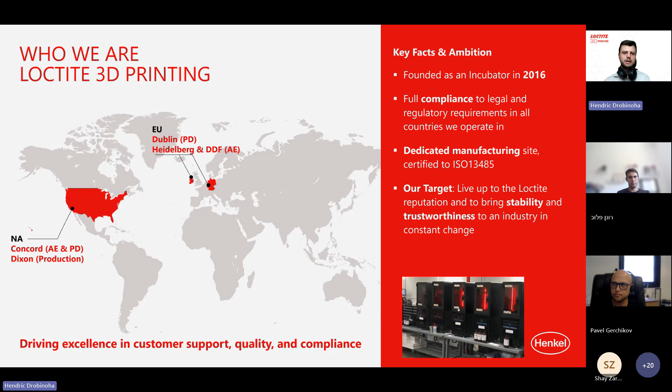We have in total 3 different sites: Heidelberg, where I'm located, then we got Dublin, and we got Concord in California.

What are we offering? As said, we are materials only, and we cluster our materials into 3 different sections. We have the photoplastics, where we have the tough materials, like ABS-like materials or PP-like materials. I don't really like those namings, but you get it. And the high temperature resistant materials, as well as chemical resistant materials.

Then we have in the middle the photoelastic. So photoelastic is the elastomeric resins, because our resins are not elastomers, they're elastomeric-like, because the complete base of our materials is still acrylate, the polymer acrylate, and just the additives and different ingredients make the materials tend to one specialty or another. But we don't have a real elastomeric, even though people say about their materials that they're elastomerics.

And then we have the last sector, which are the resins for healthcare. I will speak a little bit more about that later on, because healthcare can be very complex, and the approach in the market is very confusing, to be honest, because everyone is talking about biocompatibility, and by the end of the day, it's not working out and no one knows why. So I will talk about that more later on, but we do have materials for the healthcare sector for medical devices.

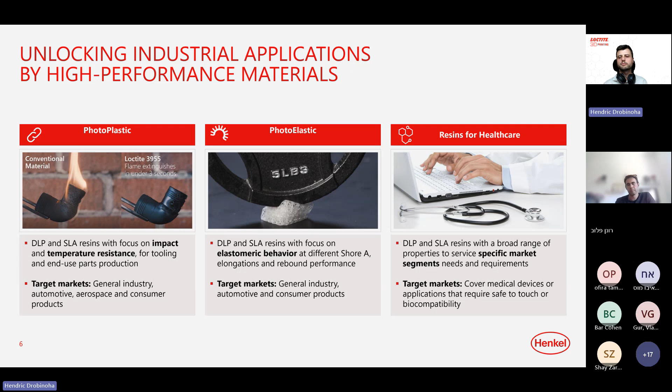That being said, I don't want to lose any time, so let's jump into our materials. We say that data is our currency, so our whole organization is built up in a way that we're fully focused on our materials and creating data.

Sustainable and real data. On the website, we'll make an excursus later on so I can show you some tips and tricks where you can find some stuff on the website. But it's really all about our technical data sheets. That's our most valued document, and we try to have an approach where we give the customer as much data as possible.

Compared to other conservative materials where you maybe have like 2 or 3 pages just with absolute data on mechanical and thermal properties, we really extended that to having more aging data, resistance data, and so on and so forth. So our technical data sheets are really our bread and butter.

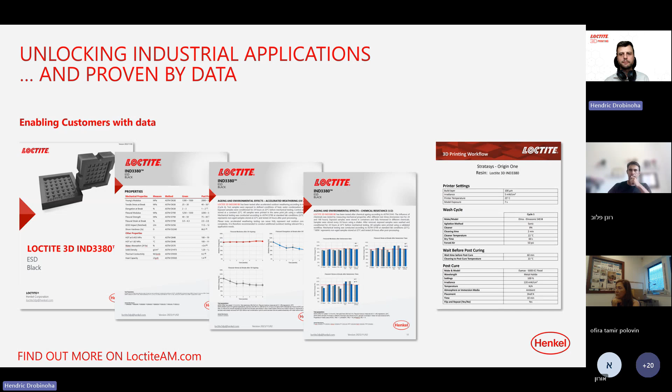So the first one is the ESD material. ESD in 3D printing is not new, but what's new is the very high temperature resistance of this material. It can easily withstand 200°C, and has an HDT of 190, meaning at 190°C it starts to deflect under a certain load. It's a very stiff material, but also has very low elongation at break, so it's not a tough material. It's very rigid, very stiff, but high temperature resistant.

In terms of ESD properties, it's in the middle. If you have customers in the electronic space asking for an ESD-safe material, that can mean everything within the range of the standard, which is 10^4 to 10^11 ohm surface resistivity. That's quite a big gap, and that's something we discovered while developing this material. We could go more to the low, dissipative side, or more to the isolator side. So we asked a lot of customers what their preferred range was, and it turned out everyone had specific desires. We ended up in the middle. Even though we display 10^4 to 10^11, this material is more in the middle when it comes to ESD properties. We try to cover the broad spectrum.

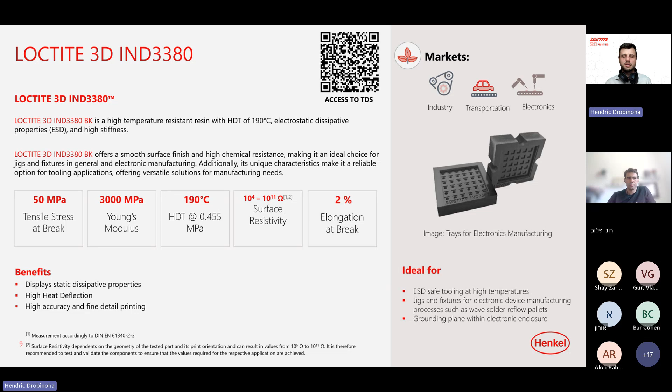People ask us, what can I do with this material? For sure, there's jigs and fixtures, tooling, soldering. But I picked out a case study from Nokia, because I think it's always best to have something tangible to show what the material is capable of.

So Nokia had an issue. They have very expensive PCB boards, and you don't want to waste them, not just for sustainability but also cost. So they want to repair their boards. If they want to desolder a part, they need heat, but it's very hard to concentrate a heat beam on a specific area of a PCB board - you always heat up the area around it. That's what's happening here: they're using an infrared spectrum heat lamp, but they're also heating up everything around it.

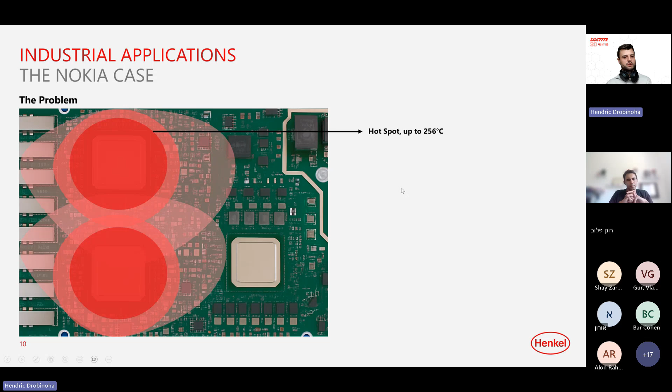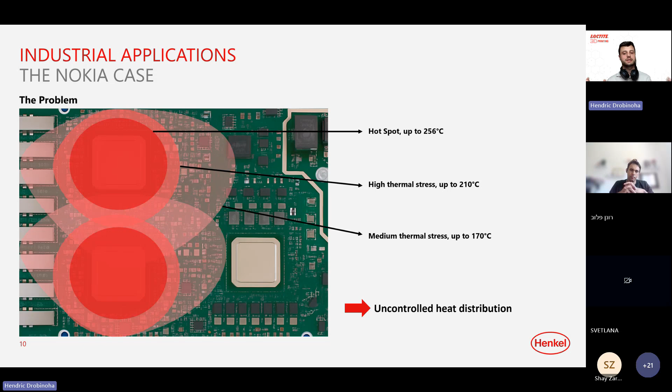This is an issue because you want the hot spot in the middle at 250°C, but you also get high thermal stresses around it. So you have uncontrolled heat distribution, potentially damaging parts on the board around it. So they thought, okay, we need a shielding solution.

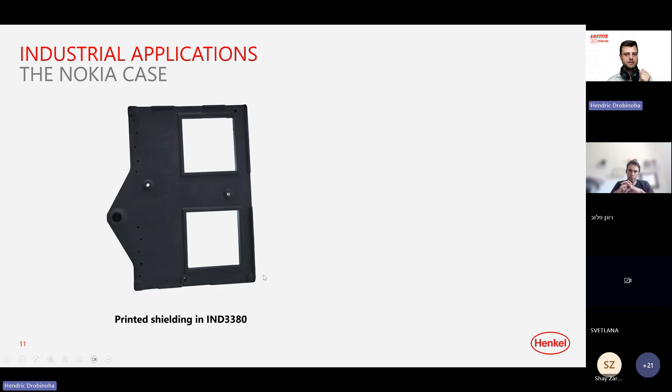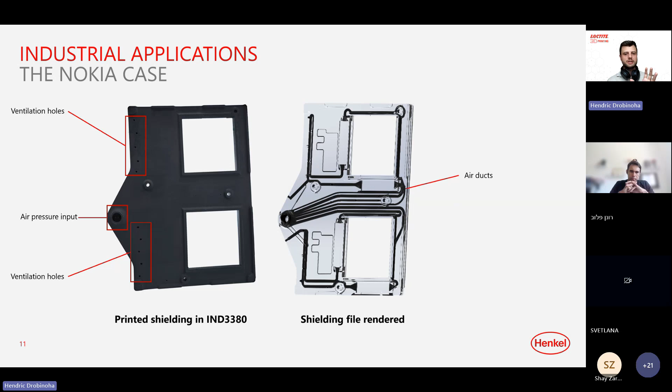This is printed with 3380. On the left-hand side is the final shielding. On the right side is just a rendered file showing the inner channels with cooling, and they use it directly on the PCB board with a small gap. They also protected it with another metal shield, but by the end of the day they were able to decrease the temperatures around it by more than 50-60°C. So all the other components on this PCB board are safe now. This is a solution they're now rolling out globally. It's really a big thing, and they needed a 3D printed part because PCB boards don't always look the same - they always look different, so you always need a new geometry. That's where 3D printing comes in handy.

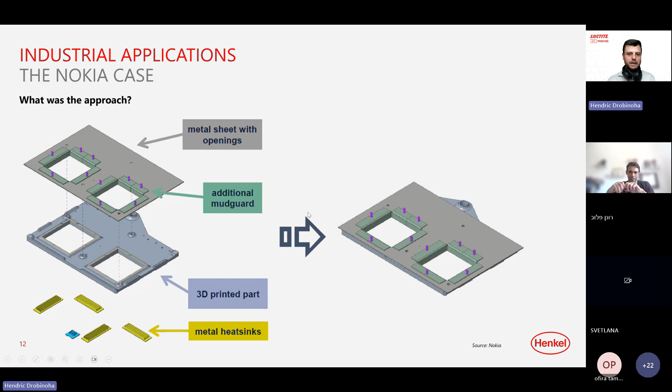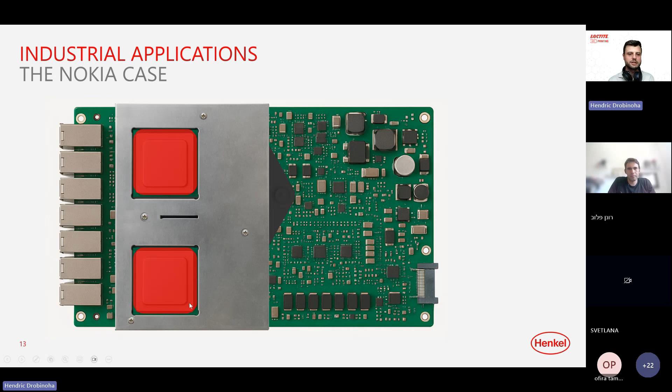I think that's a fantastic example, and we're very happy and thankful to present it, because the coolest applications are always under confidentiality. So happy to present it today. That's the final PCB board with the shielding in the end, and as you can see, the heat is only distributed to the processor in that example.

Next, the material I want to talk about is the 249. Our materials are, as said, acrylics, but they're also different from most other plastics in the world because they're not thermoplastics - our materials are thermosets. Thermosets, by their nature, are very chemically resistant. So we thought, our materials are good compared to thermoplastics in general when it comes to chemical resistance, but what about having a material that's really, really good in that sense? So we developed the 249. It's a very stiff, very accurate material, easy to print. It has good temperature resistance, and it's decent when it comes to toughness.

I mean, 5% is not high. It breaks not fast, but you also can't throw it against the wall. But it has a really, really good chemical resistancy.

So on our data sheets, we usually do a chemical aging where we expose our materials 1 day up to 7 days against a specific chemical. And this is an ongoing process. The first round of chemical aging was done in the past years, and now we're doing the second round. We already did an aging against 7 chemicals, and now we're doing the second round. So this material here, you can also see the cover here for the gasoline tank. This material is really good when it comes to chemical resistancy.

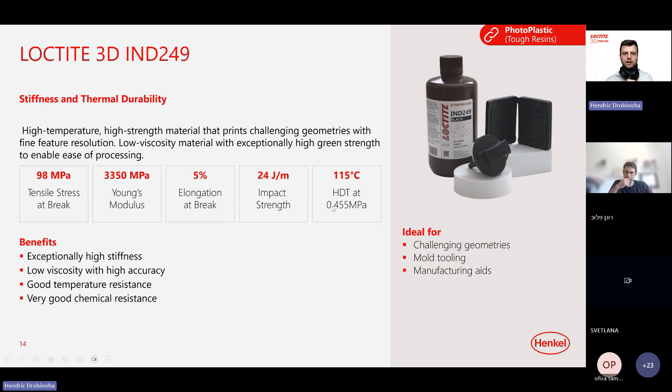Next material is in the medical space. So before I start talking about the material itself, I want to cover a little bit about the medical sector as a whole, because I don't want to talk too much about it, but I just want to raise the awareness that medical healthcare is a very complex sector.

So people are always talking about biocompatibility. They're moving around saying, yeah, is your material biocompatible? Oh yeah, cool, then I take it and use it for whatever healthcare application. And that's not right, because you need different testing if you use, for example, a hand brace for your arm, versus if you want to put a part in your body. So one is definitely a higher risk than the other.

So you really have to look at what kind of certifications a material has, and what kind of medical classes, following the European norm here, the material can cover. This material, the MED 9851, is our answer for medical class 1 and 2.

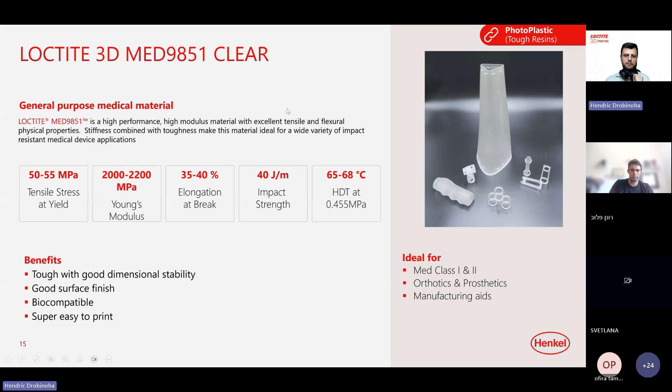But because some materials can do higher grading, we invented the 3394. This material is for hospitals, for surgical tooling, for applications in contact with tissue or bones. We call it the sterilizable resin because theoretically you can sterilize everything, but the question is how the parts look afterwards. This material was specifically developed for sterilization.

It can easily withstand 25 cycles of steam sterilization without deforming or losing properties. But the most important thing here is the biocompatibility standards we have on this material. It's not only the 5, 10, and 23, the standard skin-based testings, but also acute toxicity and USP class 6.

The USP class 6 is in its own ranking. USP is something like the MDR or FDA. 6 is the highest level, and it's required for a lot of applications to have USP ranking. So USP 6 is the highest, and here we have tested tissue and bone contact, for example.

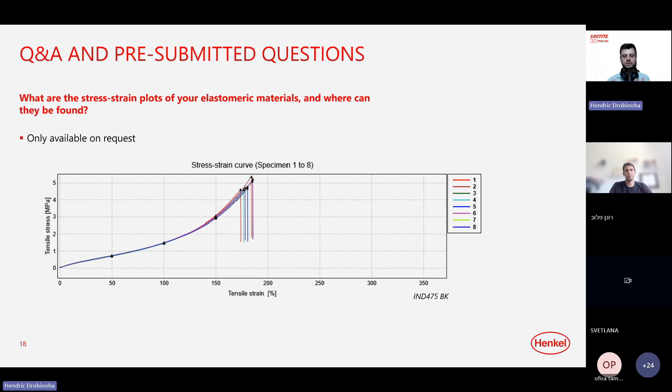The second one, and it's a very common one, is the 475 issue. The 475, for everyone who doesn't know, where the bell isn't ringing, is an elastomeric material. We have it in white and black, and it has an issue. The issue is that when you print it and post-process it, it's sticky. And no one wants sticky parts, not just because it's sticky, but also because people think it's toxic, and that's not the case. So I can already tell you that this is not the case.

What is actually happening from a chemical perspective is when you're doing the post curing, you put your light on, activate the second reaction of your photoinitiators, and you want to have only the components of your composition being reactive. But there's oxygen. Oxygen is floating around everywhere, and oxygen is very aggressive, and it wants to have a place at the chain of this material. And this is the reason why it's sticky. It's the oxygen. So the mission here is keep the oxygen away.

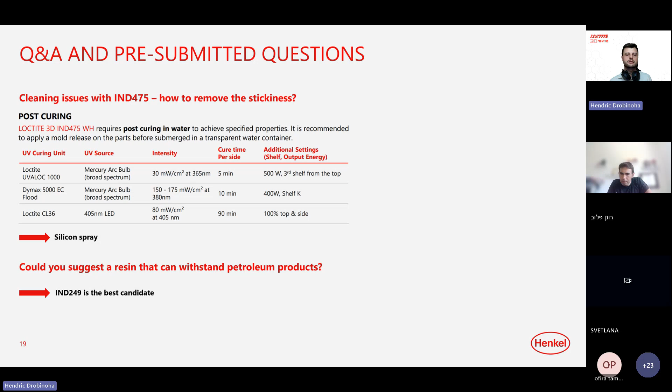Third question: could you suggest a resin that can withstand petroleum products, fuel and stuff? We are currently doing the second round of chemical aging, which includes 7 chemicals from the automotive section, like braking fluid, gasoline, all that. It's still not published, it will be published later this year, so we're currently consolidating everything. But what I can say is that the 249 is still the best candidate here. It has, as said, the highest chemical resistance, and it should be able to handle it, though I can't say for sure because I don't know how long you want to expose it to or what the other conditions are, but that's definitely your best candidate for these kinds of chemicals.

Lastly, before going to the web page, I combined 2 questions because they're going in the same direction. The first question was how to choose the most suitable material for your application. Good question. And is there a library with all the technical data where, by entering a certain known property, one can receive a recommendation for a suitable resin?

I have a screenshot here, but I will now open the browser and go to the web page, because we have, I think, 2 solutions which will help you go at least in the right direction. Let me just very briefly go into my browser to the web page. So it's loctiteam.com, and here we got product and resins, production resins. Under production resins, if you scroll down, there are 2 links: 'not sure where to start, find my material' and 'the material brochure.'

The material brochure is something I use very frequently because there are a lot of numbers, a lot of materials, hard to keep track of everything. In this digital brochure there are tables with the most important, standard properties, like your heat deflection temperature, your elongation at break, Young's modulus, so your mechanical properties, your shore hardness, and your impact resistivity. Here you have all the numbers, so you can look them up without having to click one by one on each technical data sheet, scroll down, find the right property, and then compare it to your reference or whatever you're looking for.

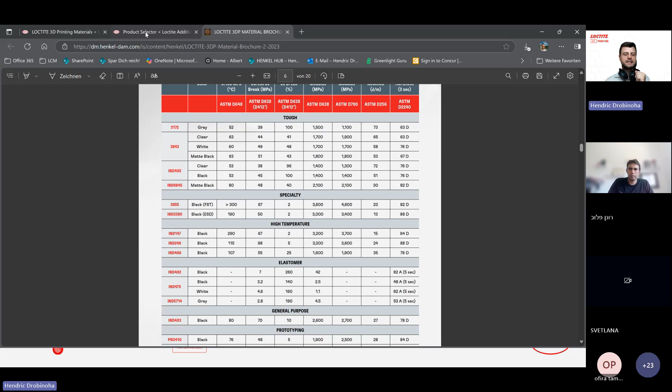All right, that's it for the presentation content. I would now open up the Q&A.

Hendric, we have 2 questions in the chat. Yes, okay. So, the one I'm interested in is about food contact material, or already got a...